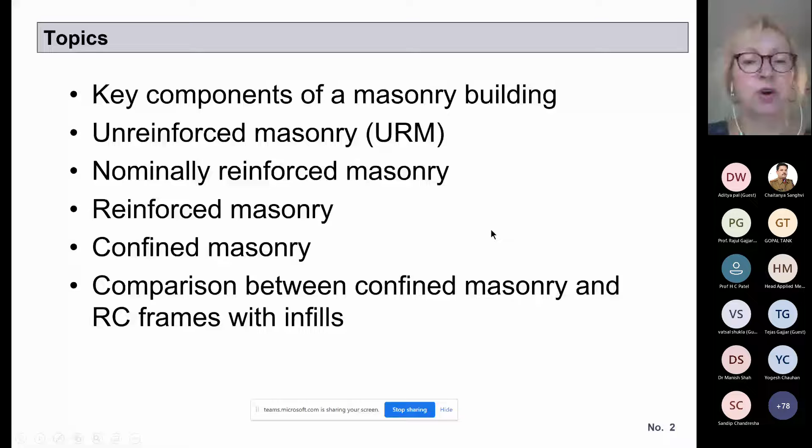So key components of masonry buildings are masonry walls, and this is a load-bearing system. There are load-bearing and non-load-bearing walls. Non-load-bearing walls carry only self-weight and practically no additional loading, whereas load-bearing masonry is what we are designing as structural masonry, which carries both gravity loading and lateral loading. It is a structural system in the same way as the frame is a system.

Horizontal structural components are very important in masonry buildings and influence their behavior, and these are floors and roof structures. In this course, we'll be mentioning them as diaphragms when resisting lateral loads. So even though it is floor, we will call it diaphragm for this.

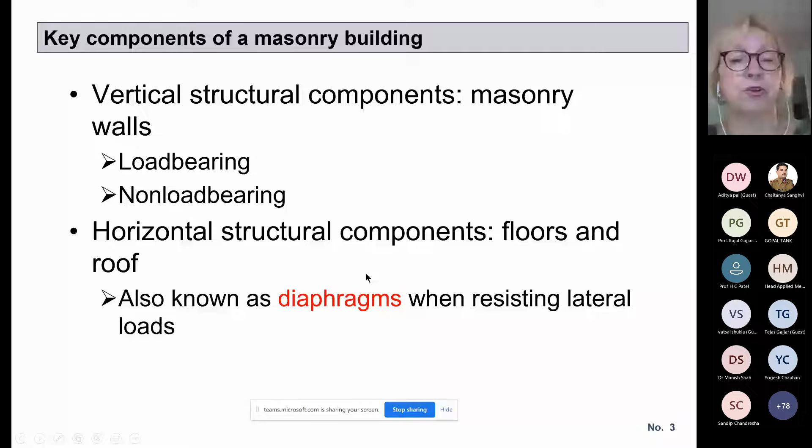So this is a typical masonry building with lots of walls in both directions, as you can see, and then floors. And in the building, it is very important to have very good integrity, as we were discussing, that is good connections between the walls, good connections between walls and floors and roof. And in any case, it is a completely different system than reinforced concrete frame.

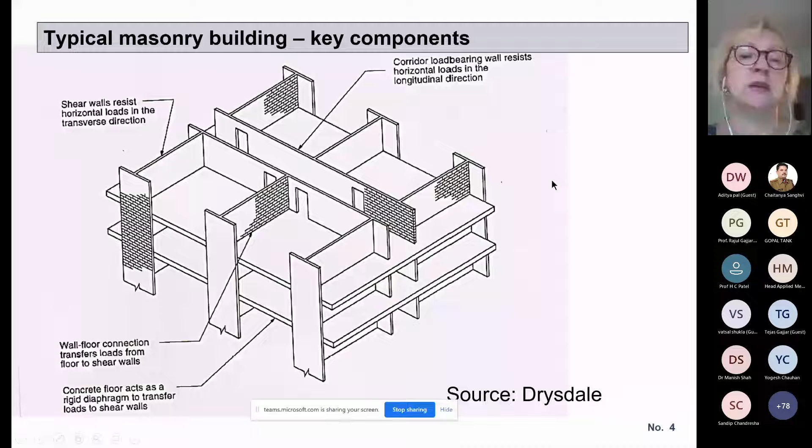And for those who are familiar and used to designing frames, in the first stage it may be a bit more unusual. I wouldn't like to say complicated - everything is maybe complicated, but we would like to try to make it simple and understandable in this course.

The first masonry technology that we're going to discuss is unreinforced masonry, or URM. In the technical literature, very often instead of saying unreinforced masonry, it's used URM, and I like to use it just for a shortcut. So these are masonry wall structures without any reinforcement in the walls, without horizontal or vertical reinforcement.

There are millions of existing unreinforced masonry buildings around the world. Many of them are in India, and since India accounts for 20% of world's population, many of these buildings are in India, but in any other country in the world we do have unreinforced masonry, since this was the technology that has been practiced from ancient times.

Until practically this century. In masonry, and we'll talk tomorrow about masonry materials, we have various masonry units. Unit is not an SI unit like meter versus imperial unit - in masonry, unit is the building element, and that could be stone or adobe block or clay brick or block or concrete bricks or block. So with unreinforced masonry, we can use all kinds of masonry units.

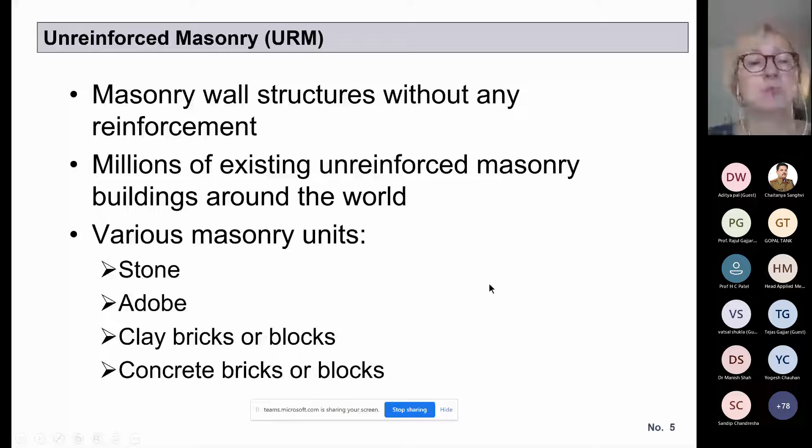Historically, there are many stone buildings, there are many adobe or unburned clay or mud buildings and so on, and they are all used in unreinforced masonry. And in general, unreinforced masonry - these are some examples from India.

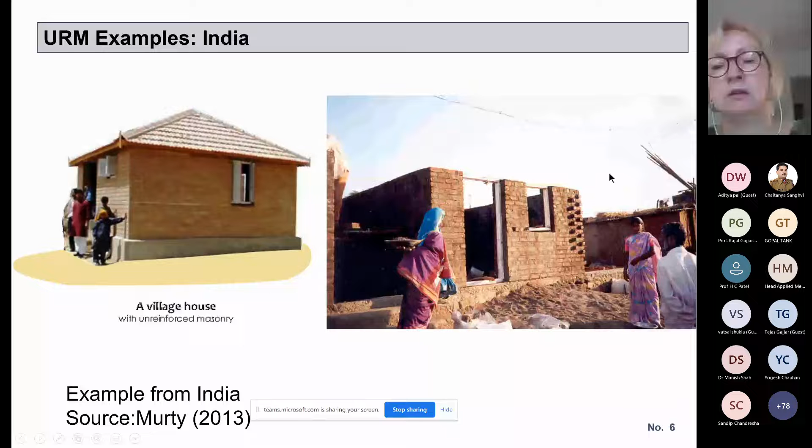Except the right photo. The left photo is from a publication by Professor Murty, published in Gujarat, on confined masonry. The right photo I took in Maharashtra after the 1993 Kilari earthquake. I worked in rehabilitation of the affected area, and people were building new brick masonry buildings with seismic provisions according to IS 4326.

These are typical brick masonry buildings in India. In other countries like the USA, there are some outstanding examples of unreinforced masonry in relatively modern times, from the 19th century, more than 100 years old now. This is one of the tallest unreinforced masonry buildings, a so-called skyscraper, 16 stories high, built in Chicago, USA. It's called the Monadnock Building. It's still standing there today.

It had unreinforced masonry walls which are 6 feet or 1.8 meters thick at the base, and the thickness decreases toward the top. When the building was constructed, there was very negative publicity, and media and newspapers claimed it would collapse within 2 or 3 years, but the building is still standing today. Unreinforced masonry is a very good technology, and as I said, it has been used for centuries or millennia.

But it is good for gravity loading when there are no earthquakes, when there could be winds but not earthquakes. And Chicago is one of those areas. It does not have seismicity there, so that's why it is no problem.

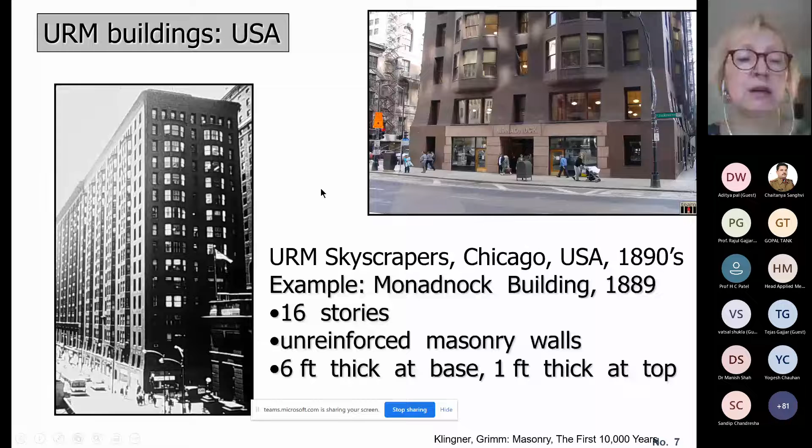However, on the west coast of the US, in places like Washington State or California, there are frequent earthquakes, and unreinforced masonry has been very badly damaged in those earthquakes. These are some photographs from the 2001 Nisqually earthquake which affected central Seattle. There were many older unreinforced masonry buildings, many of which had not been retrofitted for improved seismic resistance. This is an example where you can see the top portion collapsed - these are parapets - so the load-bearing building remains standing, but it was very badly affected.

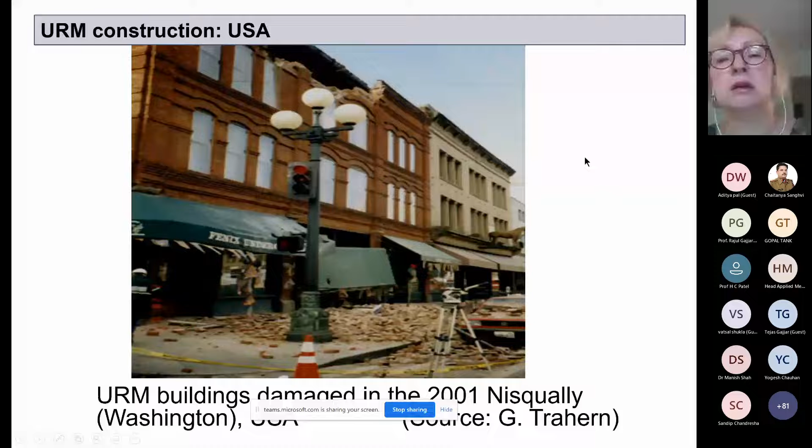Similar photographs were available after earthquakes in California. So reinforced masonry construction came about because of the poor performance of unreinforced masonry in the US, particularly in the 20th century. It was the 1933 Long Beach, California earthquake, where many school buildings were unreinforced masonry, and they were badly damaged or collapsed.

There was a decision at the government level to introduce reinforced masonry, and that practice started after that earthquake in the US, specifically in California. To this date, in the US, most masonry buildings constructed are reinforced masonry, but in some places it is still permitted to use unreinforced masonry if there is very low or no seismicity.

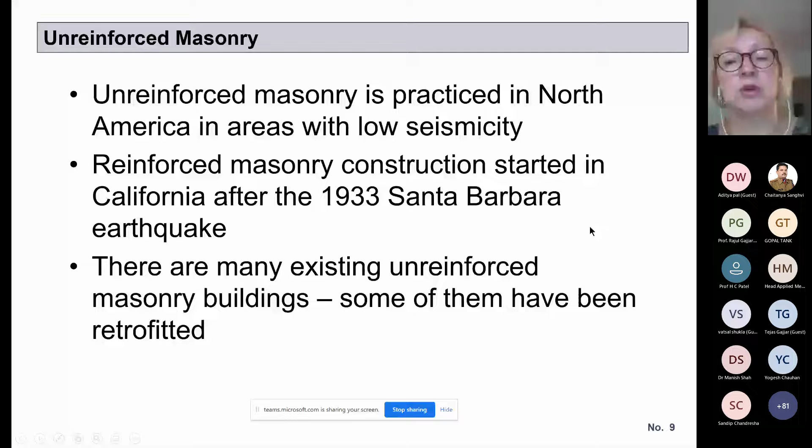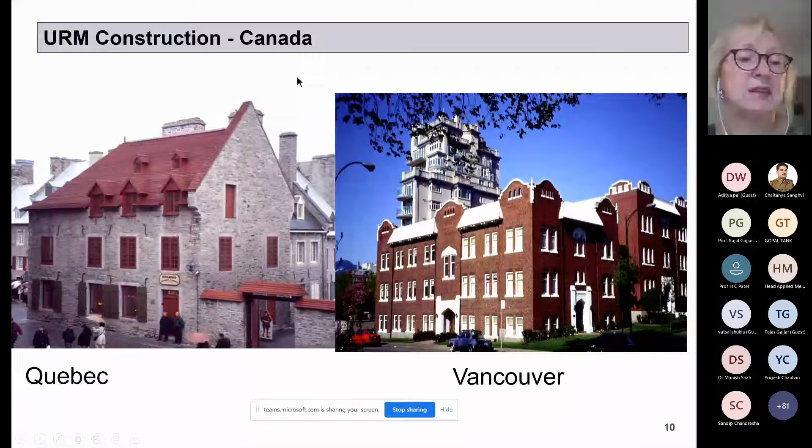There are some examples of masonry buildings from North America - these are from Canada, old unreinforced stone masonry buildings in Quebec and in Vancouver. Many of these buildings have not been retrofitted, and even though they're in high seismic hazard areas, there are no frequent earthquakes, even though the hazard is high.

In this course, we are not going to talk about unreinforced masonry anymore. The next technology is called nominally reinforced masonry. It's not generally known in the literature under that name - for example, in the Canadian code it is mentioned as nominally reinforced, but in Indian codes the term doesn't exist. So what do we mean by nominally reinforced?

We would say it is mostly unreinforced, but some reinforcement is provided at critical locations in the vertical and/or horizontal direction, such as vertical reinforcement at door and window openings and at wall intersections, and reinforced concrete bands at plinth, lintel, and/or floor level. This is the type of masonry that has been practiced in India according to the codes until now.

The idea of this technology, and any technology for reinforcing masonry, is to achieve so-called box action of masonry, which is critical for good seismic performance. Box action is when we have a simple structure of 4 walls subjected to seismic forces, as shown in the left drawing. If the walls are not connected, there is significant out-of-plane movement of the walls, and possible collapse and separation at the intersections. If there is nothing on top to hold them together, there is definitely a possibility of collapse at higher earthquake levels.

However, if the walls are somehow connected at the intersections, at the corners, and if there is a rigid floor or roof at the top, there is a good chance for box action and integrity. So the purpose of this nominally reinforced masonry is to achieve this integrity, which is a critical characteristic of good masonry performance.

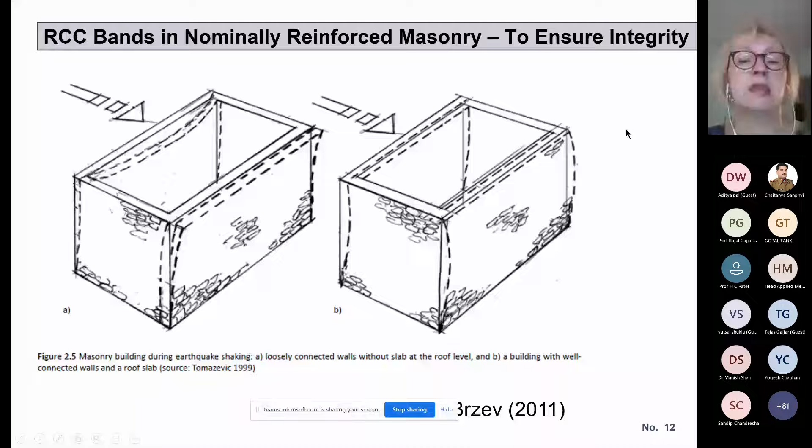These horizontal bands were introduced in India and were first seen in application after the Assam earthquake at the end of the 19th century. Good performance was observed after the earthquake, but it took a number of years to get into the codes. It is now part of India code IS 4326 and IS 1893.

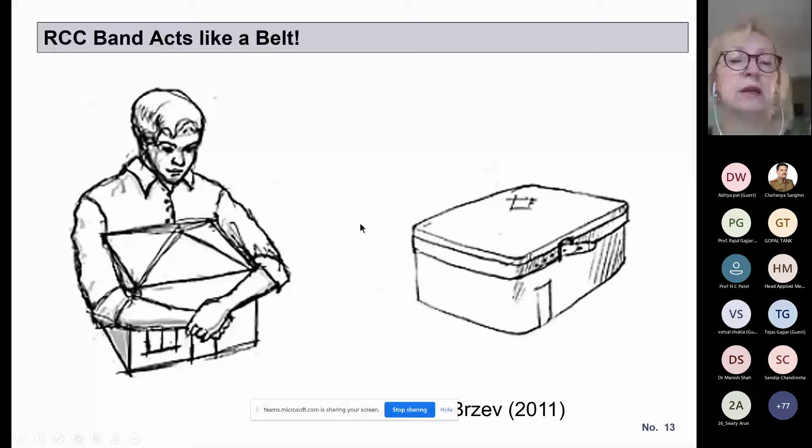In any case, the function of this belt or horizontal band is to act like a belt. These are the provisions now present in India with nominally reinforced masonry: horizontal bands at lintel level, at floor level, roof level, sill level, and plinth level. They are mandatory for masonry construction in seismic zones of India.

Unfortunately, this has not always been applied, and for that reason, in many earthquakes, including the 2001 Bhuj earthquake, masonry buildings that did not have bands performed poorly, but buildings that had bands performed much better, even though the earthquake was very strong.

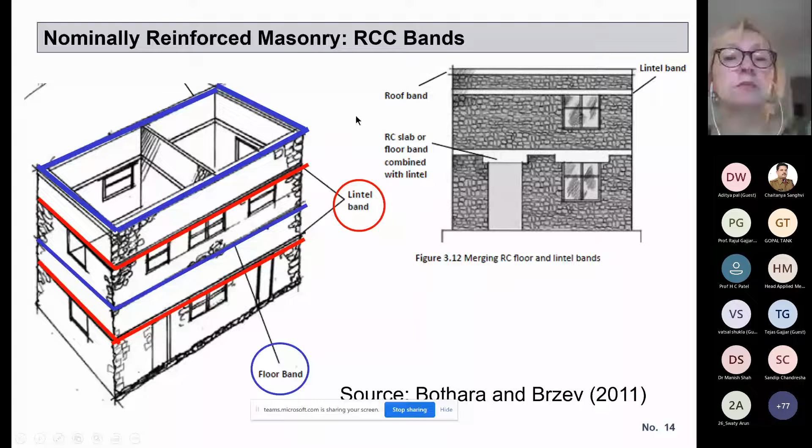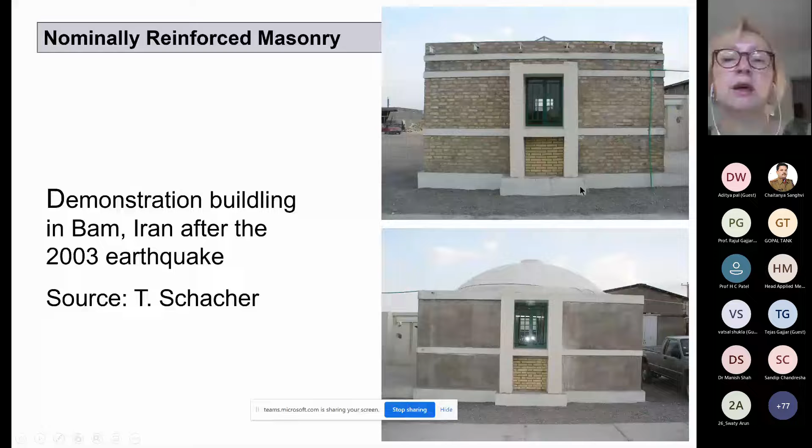In many cases, the walls were of adobe construction. So after the earthquake, they introduced bands in post-earthquake rehabilitation.

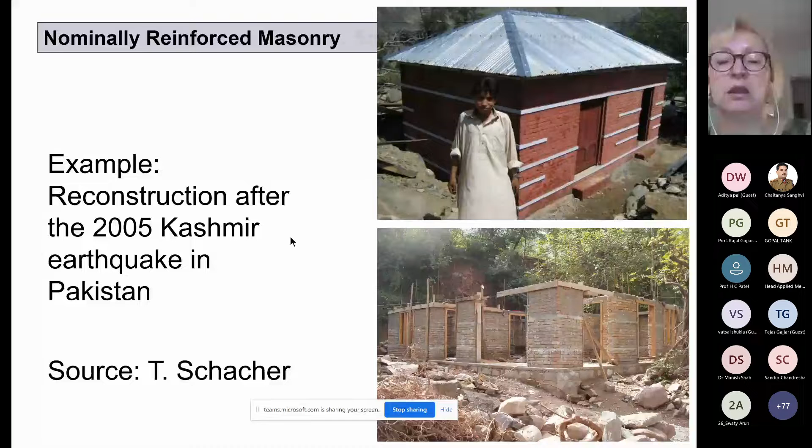Good testing has been done at different scales in different parts of that region. One important testing program of buildings with bands was in Pakistan after the 2005 Kashmir earthquake, where researchers at NED University in Peshawar tested models of stone masonry buildings. On the left is an unreinforced building with a concrete roof, and on the right is a building with bands and a wooden roof, which is common for that region.

This building has horizontal bands, plus it had vertical elements. At the corners, it had something like confined masonry. At the end of this presentation, I have videos of testing of this that was done on a shake table at the University of Peshawar under very strong earthquake loading.

As you can see, in the final results, the building that had bands experienced some damage—you can see part of the wall is missing on the right-hand side—but it did not collapse. Whereas the building with a concrete floor roof but without any reinforcement collapsed at the same level of earthquake shaking. I included a reference to the paper published related to that testing, by Professor Qaisar Ali, who is the primary author.

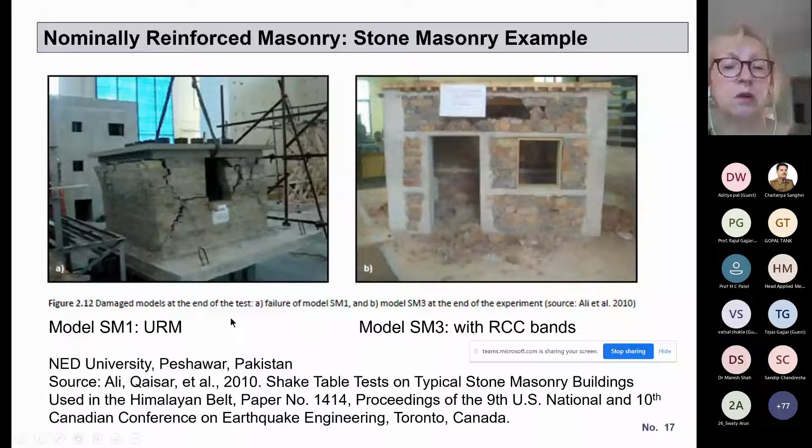In India, there were efforts to also reinforce brick masonry vertically, but this is a bit problematic and challenging for practical implementation. This is the so-called Quetta bond, which is well known in India and was developed there. It enables construction of vertical reinforcement in so-called pockets between the bricks, which are filled with mortar.

I witnessed construction of these pockets for my PhD thesis, which involved reinforced masonry with vertical reinforcement at the corners. It was very time-consuming for masons and a bit complicated because of the numerous cutting of bricks required. But it is possible to provide vertical reinforcement in brick masonry; in any case, this is one of the rare examples. It is considered difficult to provide vertical reinforcement in brick masonry.

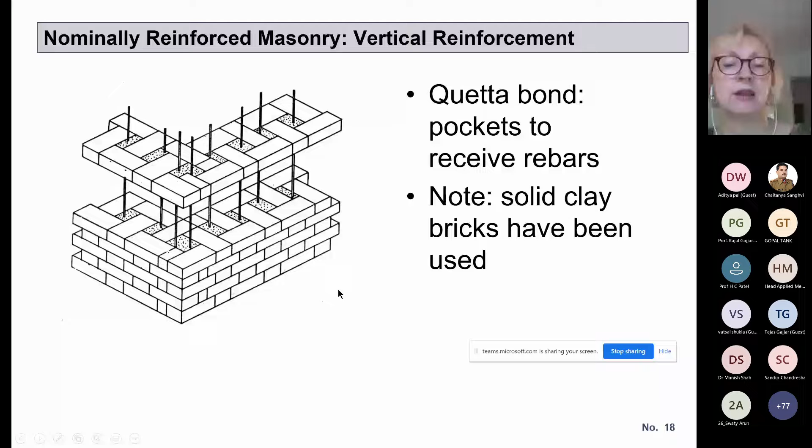Horizontal reinforcement in the form of bands is not a problem, since these are reinforced concrete elements. These are examples, also part of Indian codes, of how to provide these pockets with vertical bars. It is usually a single vertical bar which has no confinement, just embedded in mortar, not concrete. These are relatively small pockets, about 10 by 10 centimeters, so only one bar could fit there.

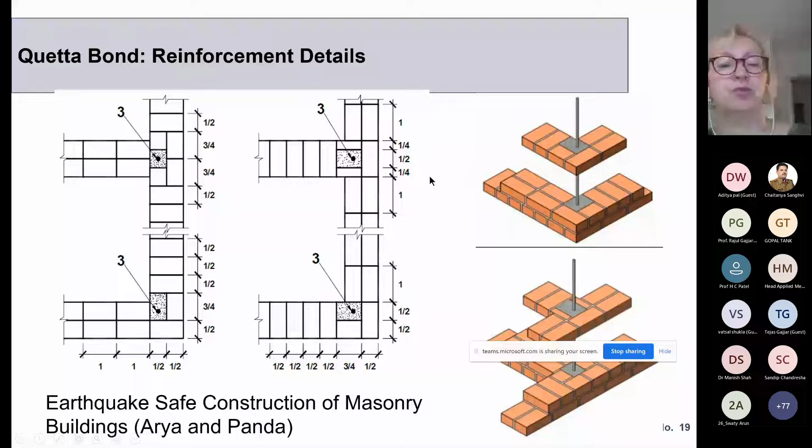So, to conclude on nominally reinforced masonry, we are not going to discuss that further since it is not the topic of this course. It's definitely much better than unreinforced masonry, and it has its own benefits.

It does improve performance in earthquakes. This was shown in Indian earthquakes. I've seen buildings in the Kilari area in Maharashtra, affected by the 1993 earthquake, which had bands. It was undamaged in that 6.2 earthquake or so, where all surrounding stone masonry or unreinforced masonry buildings collapsed. It was in the epicentral area of the earthquake. It is a very well-known building, at that time at least.

For that reason, due to limitations of nominally reinforced masonry, there is a technology called reinforced masonry. We should be careful what we call reinforced masonry, because it has been established globally that reinforced masonry means masonry with internal horizontal and vertical reinforcement. That type of masonry has been practiced in North America, US, Canada, and then Australia, New Zealand, UK to a certain extent. It is not much practiced in Europe, but North America for sure is the area where it has been practiced significantly.

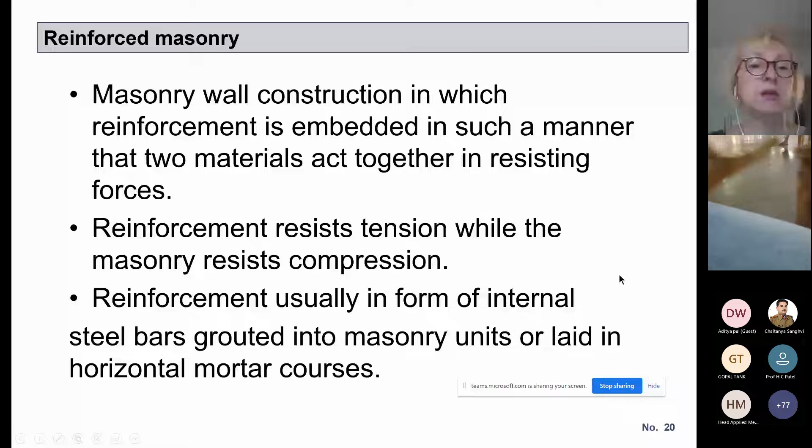Here are some examples of that masonry construction. You can see hollow concrete blocks. On the left photograph, you can see horizontal reinforcement in the form of a ladder - that is not the main horizontal reinforcement, just one form of it. The middle photograph shows a mason applying mortar on the vertical masonry joints, and then a mason laying a block. These hollow concrete blocks are pretty heavy - weight of one block is about 15 kilograms, much heavier than bricks, which are about 3.5 kilograms or so.

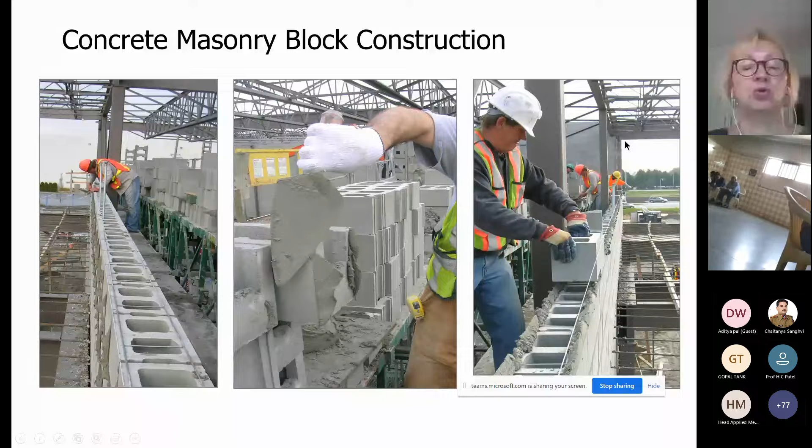This is a drawing that shows schematically how reinforced masonry is used, how it can be constructed. You can see vertical bars in the hollow cores or cells of these blocks, and around it, this shaded area is concrete. It is actually grout, but it's not mortar - it is like a micro concrete, so small size aggregate is used.

And horizontal reinforcement comes in two forms. One is this ladder type reinforcement with small size wire, like 3 mm, called joint reinforcement because it is embedded in masonry joints. Then there is another type called bond beam reinforcement, which is the same type of bars as vertical reinforcement - the same bars used for reinforced concrete construction, like 16 mm, 20 mm, or 12 mm bars.

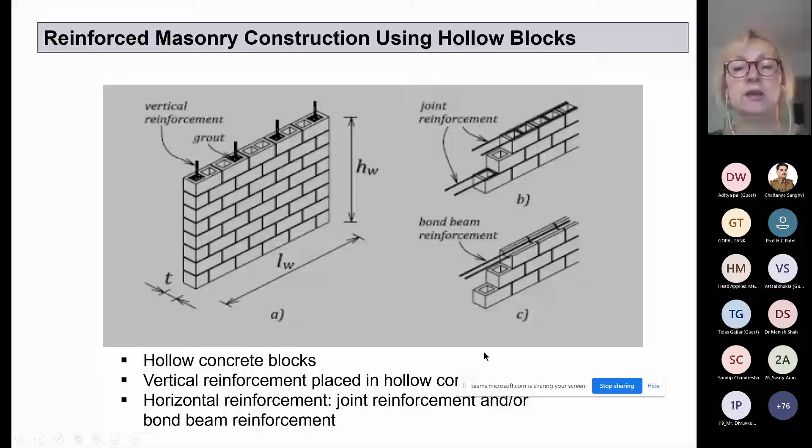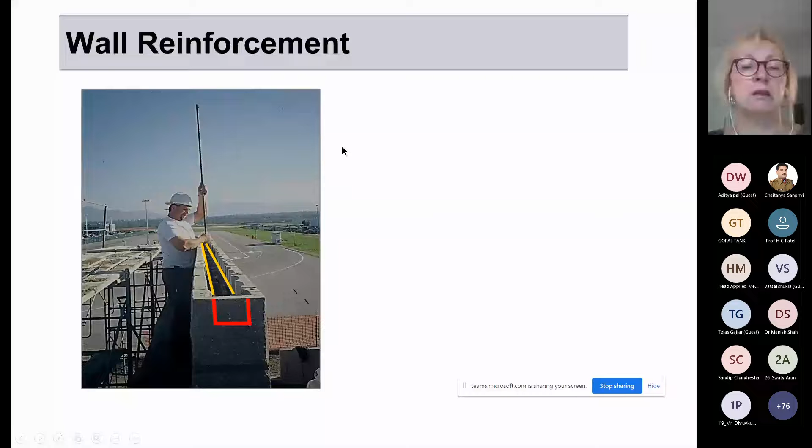So these are some examples, and this type of masonry is practiced extensively in North America - no other form of reinforced masonry is used. You can see a mason placing a vertical bar, which has to go through the entire wall height, and on the left drawing the yellow color shows these horizontal bars. The red area shows where blocks have been cut to enable continuity of horizontal reinforcement. On the right, you can see the wall after grouting, with vertical bars frequently spaced.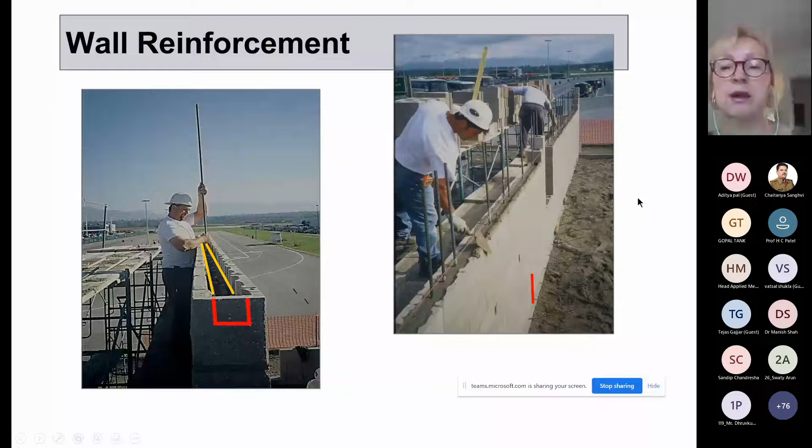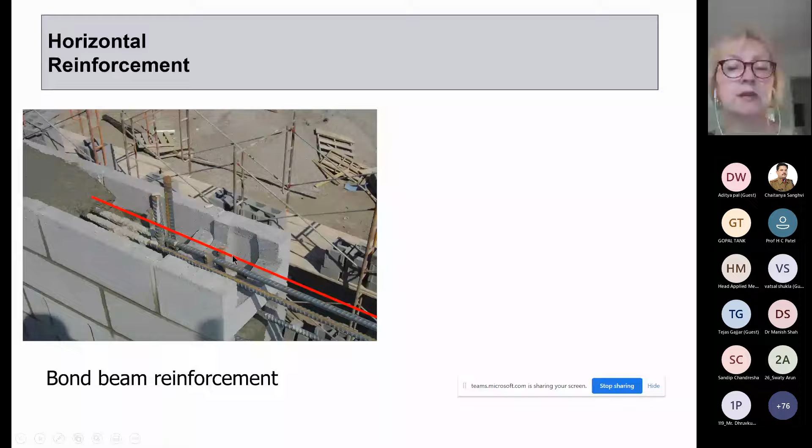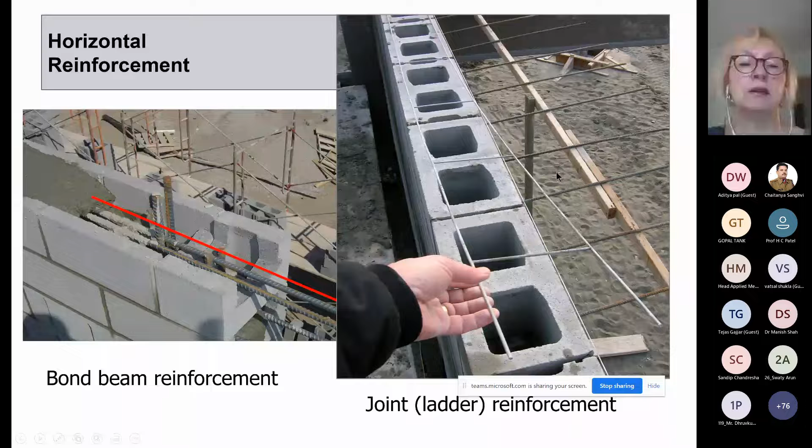So here you can see bond beam reinforcement. You can see how the blocks have been cut to receive this reinforcement, and you can see ladder reinforcement, which can now be clearly seen - there's a very small size bars. This bond beam reinforcement is Tor steel, same as vertical reinforcement in reinforced masonry. So it's practically the similar system like reinforced concrete, except there is no need for formwork, since the blocks already create a formwork for this construction. So it's very practical and cost effective, since formwork costs have been saved.

This is a final photograph of this. And this is how a vertical section or elevation of a wall looks like. You can see the shaded areas which show locations where the bars are provided, and you can see that there are quite a few bars in vertical as well as horizontal direction.

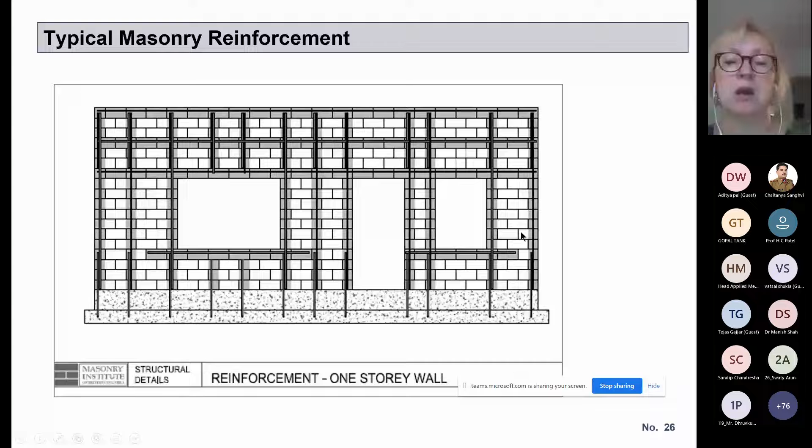Grouting in this reinforced masonry is, as I said, micro concrete. This photograph shows an early application of grouting with a bucket, from the end of the 19th century - from 1868 in the USA. It's a cementitious mix. Grout is a cementitious mixture used to fill cores or cavities in masonry construction.

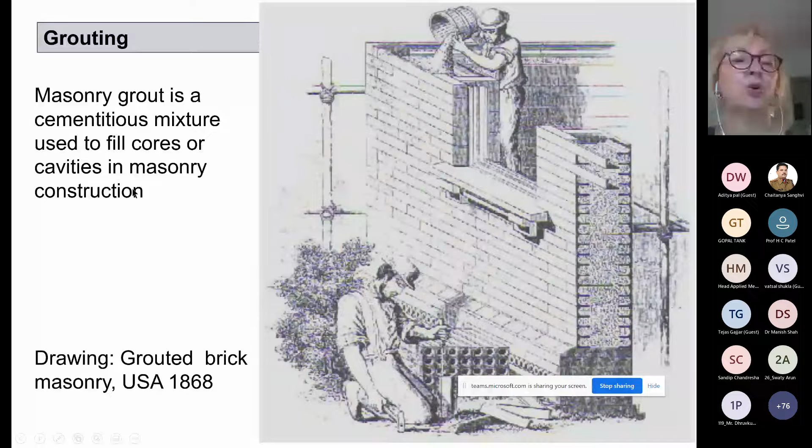So you can see how it looks like in modern masonry construction in Canada, USA, and other countries. Grout is usually placed when a truck comes - the grout is manufactured in the truck and then placed by a hose into the masonry, pumped into the wall in the same way as concrete would be poured. You can see here the process of grouting.

This explains this technology, which is very efficient and used widely in some countries, but is not used in most of the world. I would say most places would not use this reinforced masonry in this form like it is used in Canada, USA. Now I think there is a growing use of it in Mexico as well. I think that is the end of this.

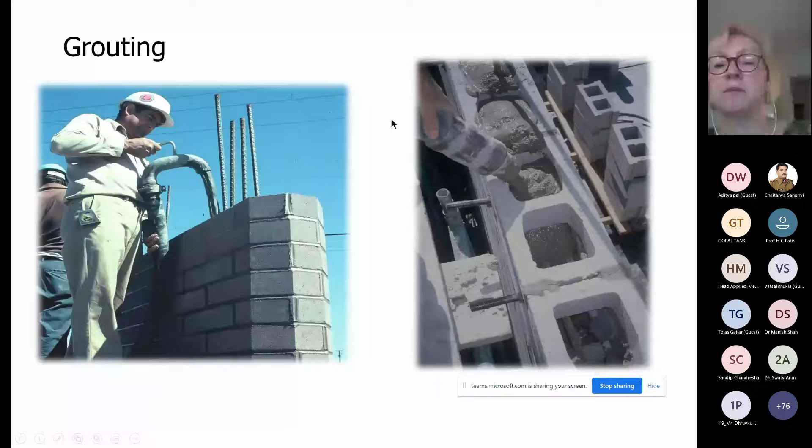This is an example of reinforced masonry construction in Canada - a school building. You can see an interesting example of a curved wall which can be constructed using this technology. So very often the exterior facade of this building is not plastered - it's just left exposed, and this is possible even though weather conditions may be harsh, but there are no problems because reinforcement is fully embedded and there is no possibility for corrosion in this type of construction.

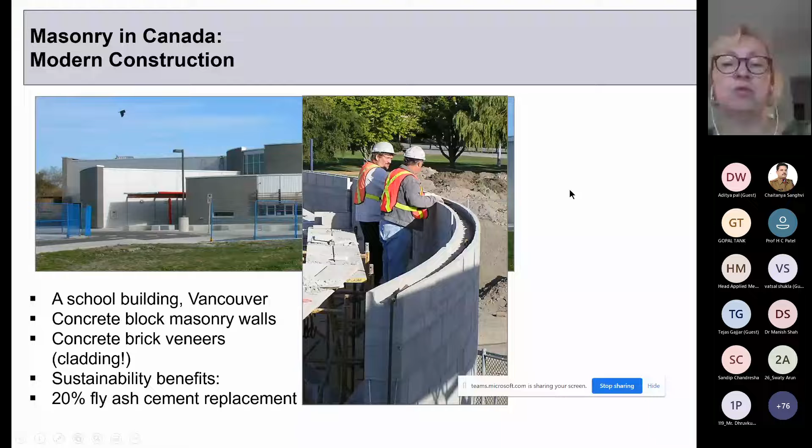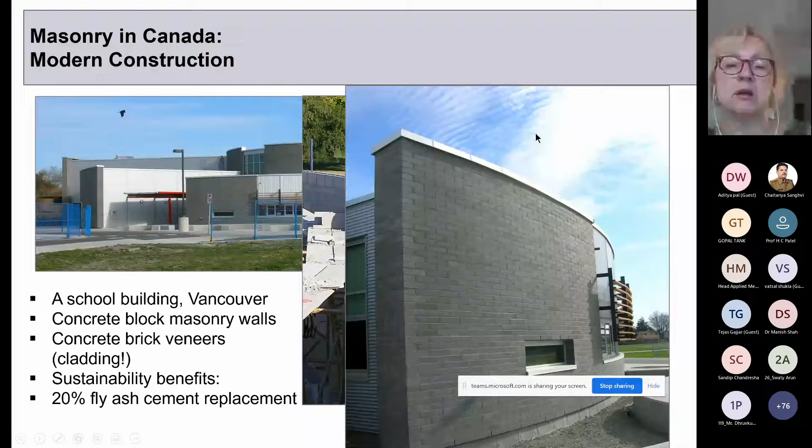So this is exterior - this is also an additional layer of masonry exterior, which is so-called veneer. It's like a facade element on top, an additional layer, which is non-structural in masonry buildings.

In Chile, for example, I've seen examples of reinforced masonry with hollow clay blocks. They would look the same as concrete blocks, but they're made of clay. In Chile, they mostly use confined masonry, but I've seen examples too. So in some Latin American countries, even though confined masonry is the prevalent type of construction, they also use reinforced masonry, in some cases with clay blocks. But such blocks, I believe, are not currently available in India.

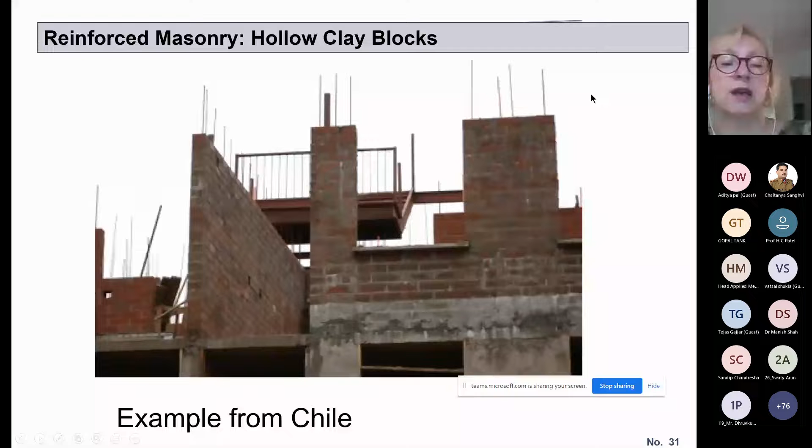On the large scale, masonry units or elements may be expensive. To conclude about reinforced masonry, it's a very good form of construction if the type of masonry units or elements are available and of good quality. Right now in many countries there is a tendency to use concrete blocks made at small scale facilities without proper conditions for manufacturing, which leads to poor strength of masonry construction.

So for that reason, unless there are good large-scale plants for manufacturing, it is better not to use reinforced masonry in high seismic zones. That brings us to confined masonry, the last part of this lecture. This is an introduction to confined masonry, to define confined masonry. If we were in a classroom, I would ask how many of you know about confined masonry or have seen a confined masonry building, since the code has just been issued in India and there were not many prior examples.

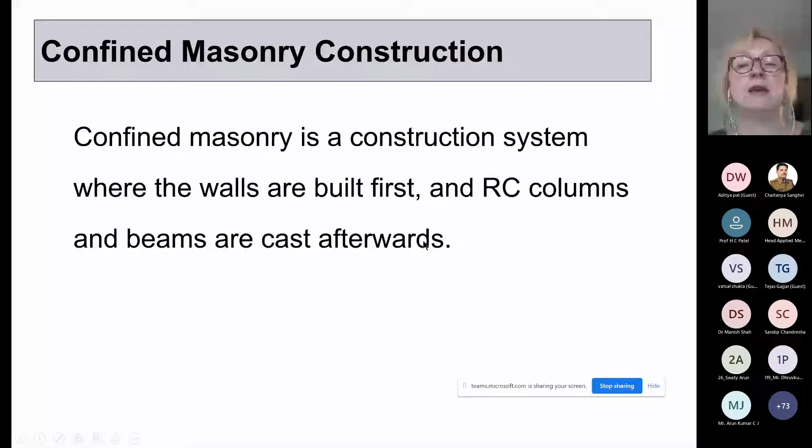So confined masonry is a load-bearing masonry construction system, same as unreinforced masonry and reinforced masonry. In that system, walls are constructed first, but there are reinforced concrete column-like and beam-like elements which are cast afterwards. And these are some examples.

These are graphic examples from a publication by Tom Schacher, also available through NICEE. On the left side we can see a confined masonry structure with masonry walls, and in the corners and specific locations, confining reinforced concrete vertical elements with reinforcement and concrete. Whereas in reinforced concrete frame construction—and we'll discuss this difference between the two systems at the end of this lecture—

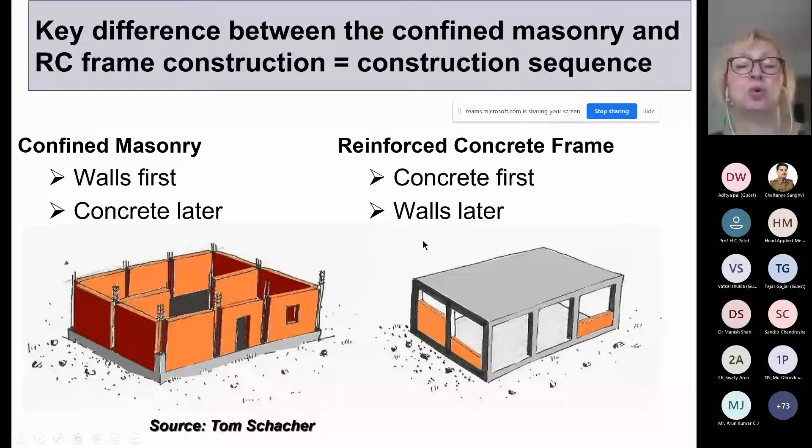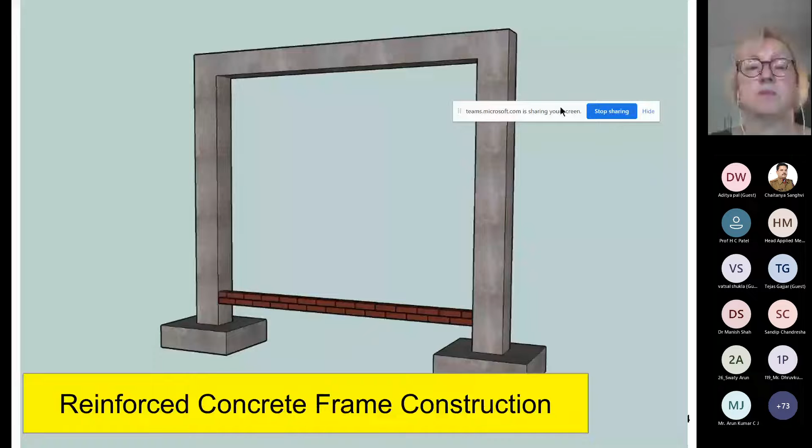first we construct the reinforced concrete frame, and then masonry walls are infills, merely infills to the frame. So that is a different sequence, an entirely different system, even though they may look alike once construction is finished. This is an animation of reinforced concrete frame construction—this is how it looks like.

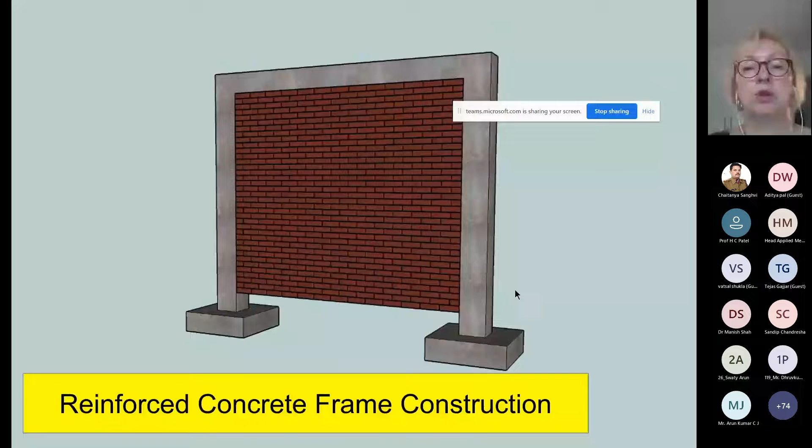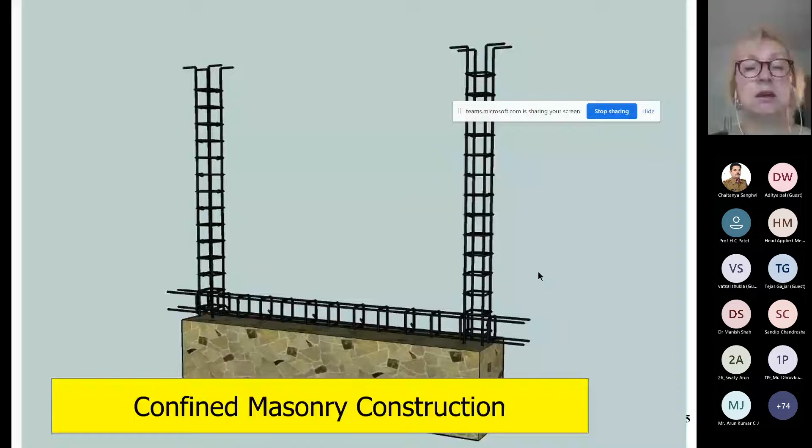For confined masonry, reinforcement has to be constructed at the beginning. This is the foundation level, plinth band, then masonry walls, followed by reinforced concrete tie columns, then the tie beam horizontal element, and then the slab. So floor by floor, the construction progresses in this manner.

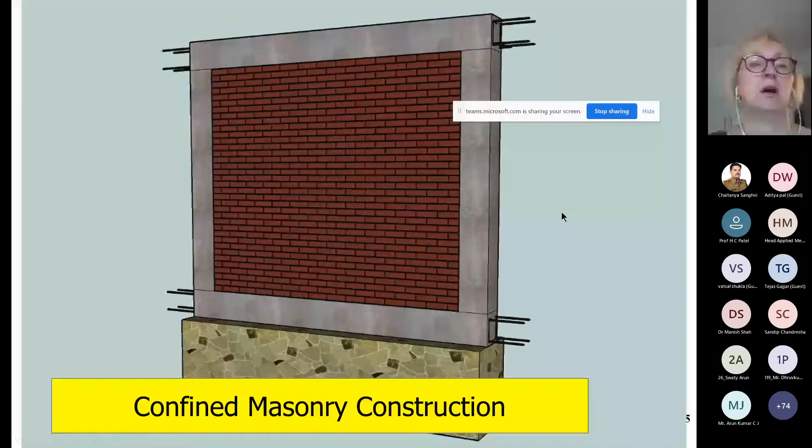Key components of confined masonry buildings are: masonry walls, made either of clay brick or block units, whether clay or fly ash, whatever is available; tie columns, which are vertical reinforced concrete confining elements resembling columns in reinforced concrete frame construction; and tie beams, horizontal RC confining elements resembling beams in reinforced concrete frame construction.

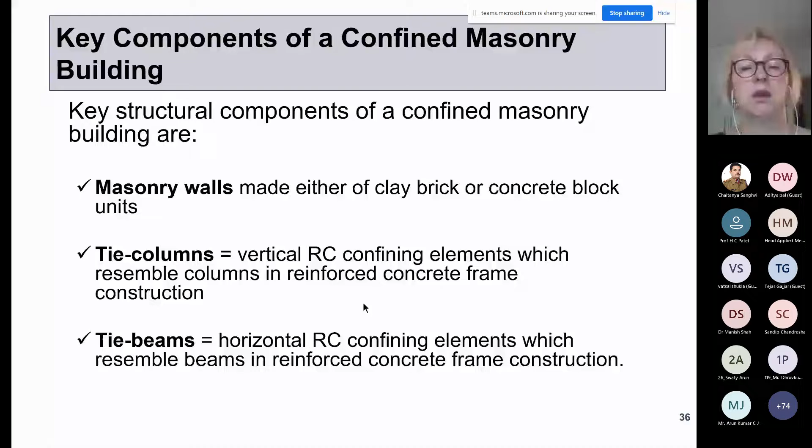Here is an example of how a confined masonry building in India will look. There are certain rules for where vertical confining elements are placed, as we will discuss. You can see this differs from reinforced concrete frame construction—there are vertical elements in the wall between window openings, and of course at corners and wall intersections. Horizontal elements are provided at floor and roof levels, but also at the lintel level.

This is not common in other countries, but in India, because of the long history of lintel bands in the code, a lintel band—and in some cases a sill band—is always present and prescribed by the confined masonry code, as you will see.

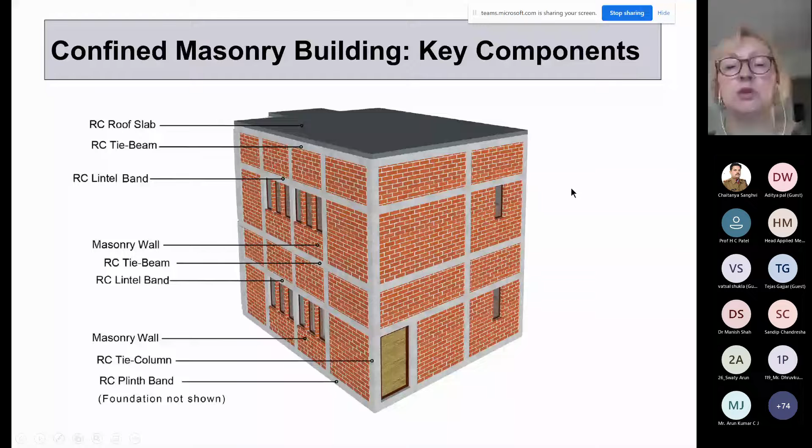So how did confined masonry construction start? What were its beginnings? It evolved through an informal process based on satisfactory performance in past earthquakes—good earthquake performance. It was not designed or developed by engineers. The first use of confined masonry was after the 1908 Messina, Italy earthquake, which had a magnitude of 7.2 and killed about 70,000 people. At that time it was used in reconstruction, but what happened is that in the area of Messina there were already some confined masonry buildings before the earthquake, and they did not collapse.

So that is how it was first observed, and when it was first observed. Afterwards, the technology was transferred to Latin America, and it started being practiced in Chile and Colombia since the 1930s, and Mexico since the 1940s, and then in other countries. So it is very widely used in Latin American countries, which are also very prone to earthquakes.

Currently it is practiced in countries and regions with high seismic hazard and risk, including Latin America, Mediterranean Europe, Middle East, for example Iran, Indonesia, South Asia, and the Far East, which is China. China, for example, has had a code for confined masonry for many years. Many of these countries have codes which have been in place for many years for confined masonry.

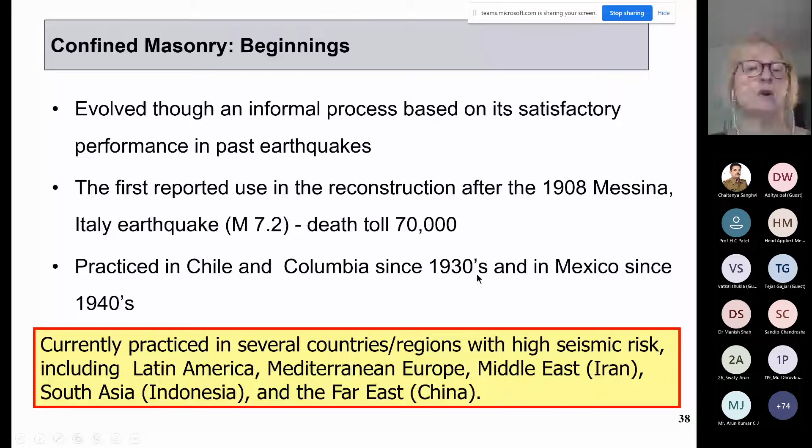Some examples: this is an example of a confined masonry building from Mexico. You may not be able to see the vertical reinforcement well on the slides right now. This is an example with hollow concrete blocks, but it is confined masonry.

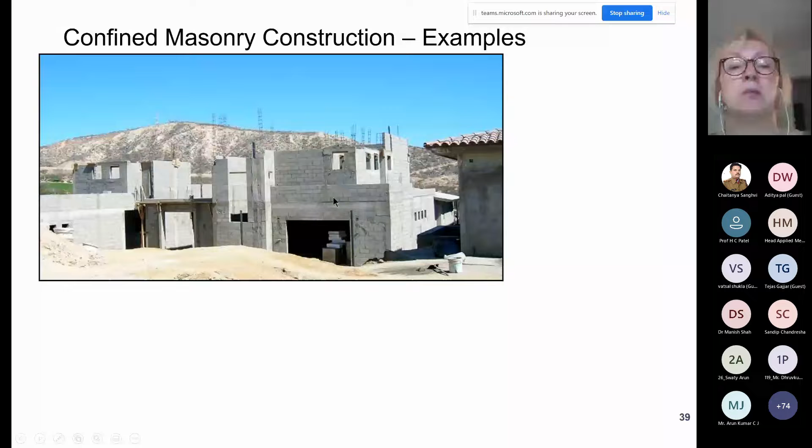This is an example from El Salvador, which is one of the rare countries where they have a band, like a tie beam, at the sill level. This is usually not common, at least in Latin American countries, and it's not prescribed by the codes.

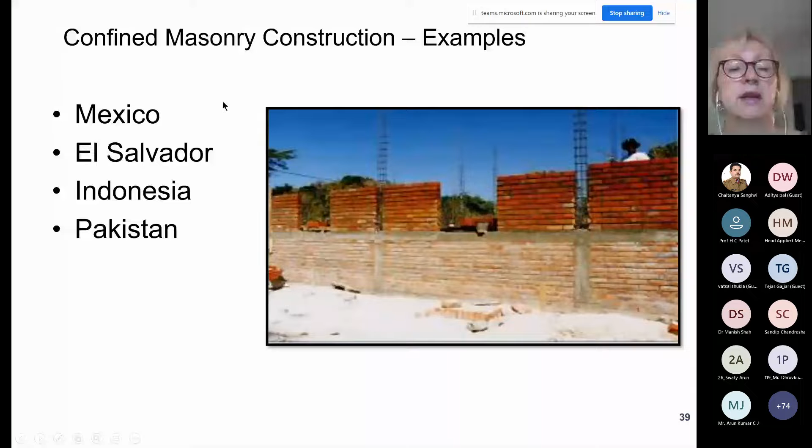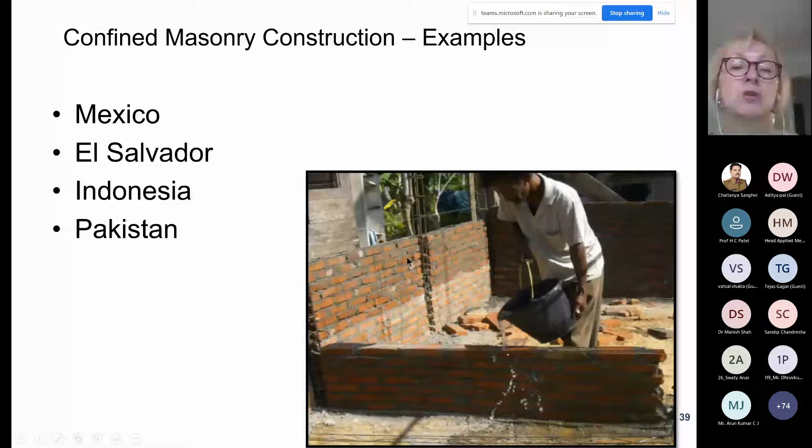The result of this earthquake was a very small death toll of only 500 people, out of which 100 died in the tsunami. So very few people died due to confined masonry building collapse. It performed really well in that earthquake.

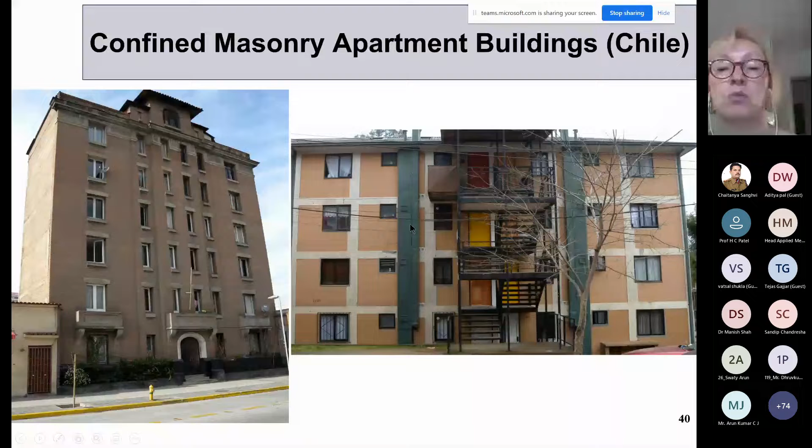As I said, it performed really well in this February 2010 Chile earthquake. And I believe you also remember that same year, 2010, but in January, a magnitude 7 earthquake struck Haiti. The death toll is not confirmed to date, but more than 2 to 3 lakhs of people died in that earthquake.

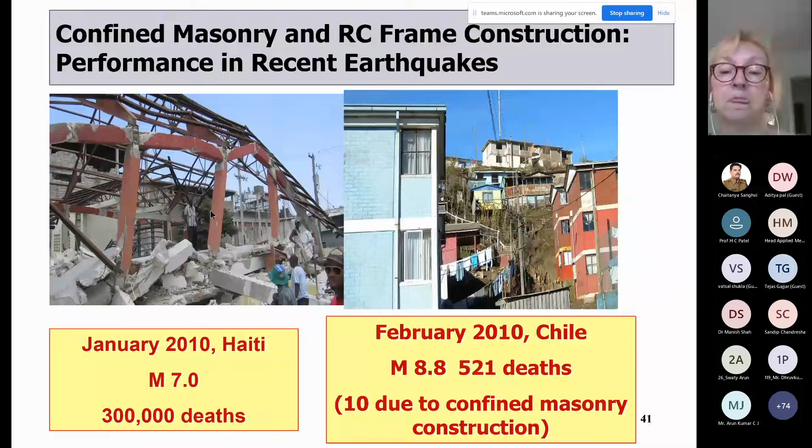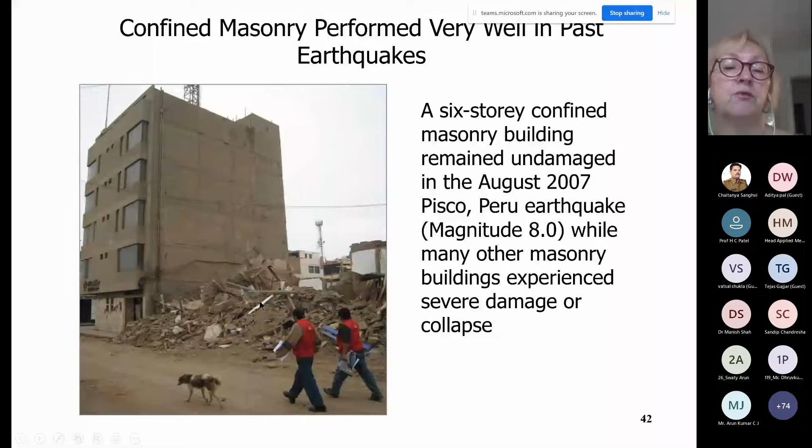In other Latin American countries like Peru, a similar performance of confined masonry has been observed. This is an example of a confined masonry building that survived the 2007 Pisco earthquake, magnitude 8, where the surrounding unreinforced masonry buildings collapsed.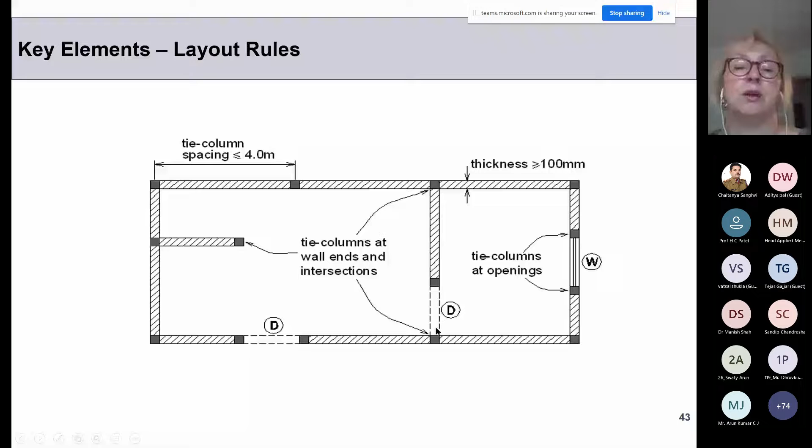Tie columns need to be placed at wall intersections, at wall ends, and at openings as well. These are some rules which have to be followed in order for a structure to be considered confined masonry. Otherwise, we cannot call it confined masonry, or treat it as a confined masonry structure. So confinement at the openings, at the ends of the openings, is critical, as well as the other locations.

There are rules, and we'll talk about that when we talk about the section on construction or detailing of confined masonry buildings later this week. What are the rules prescribed in the IS code related to the thickness of the walls, minimum height to thickness ratio of the walls, and so on? It has all been prescribed in a similar way.

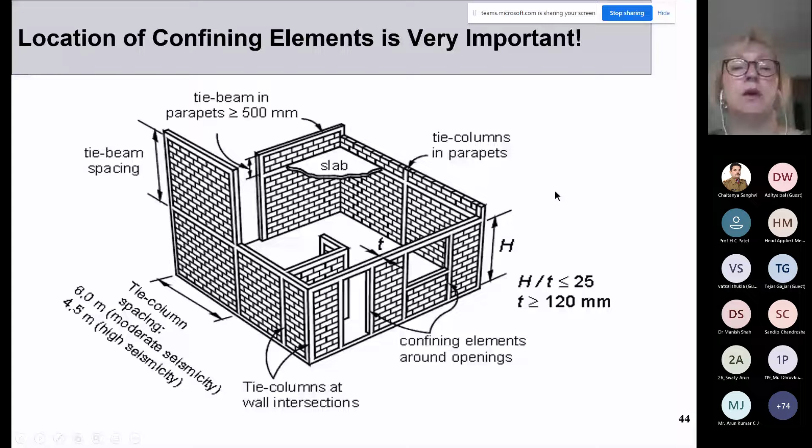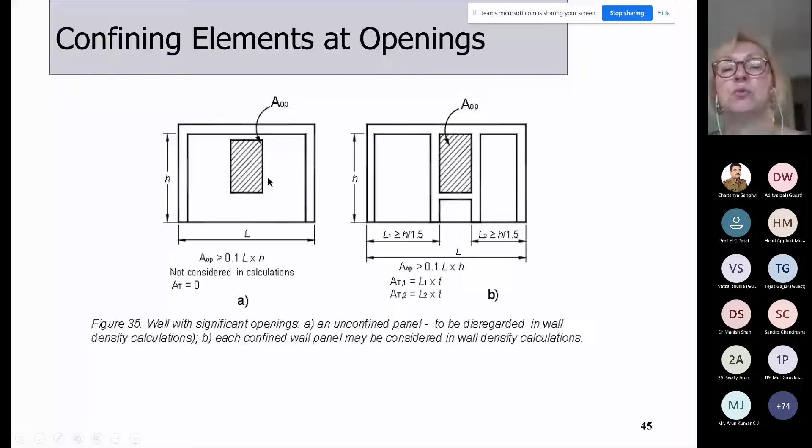If we have a confined masonry wall which has only confinement at the ends, but we have a very large opening, more than 10% of the area of this wall, we call a wall or wall panel the one that is enclosed and confined on all sides by these confining elements. If there is no confinement around large openings, then we don't consider this wall as confined. If we want to consider it as confined, we need to provide the same vertical confining elements as at the ends.

This effect of confinement at openings was revealed or confirmed in past earthquakes. Buildings that had no confinement at the openings, but had confining elements in the middle because there was another wall in the other direction, showed more extensive cracking and damage. Not necessarily collapse, but more extensive damage than in buildings that had confinement. On the right-hand side, this was a building that was exposed significantly to the 2010 Chile earthquake, and it had confining elements at the openings and performed well with some cracking, which is understandable given the size of the earthquake.

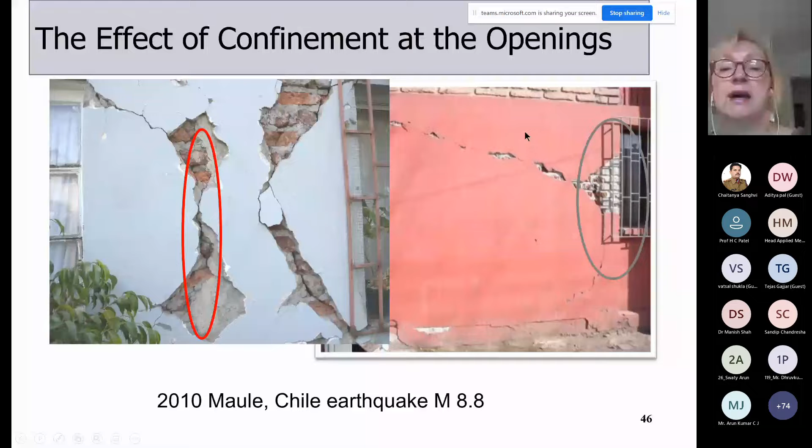Another feature of confined masonry is toothing. Toothing is an interaction, an enhanced joint action between the concrete and masonry in confined masonry walls. There are horizontal toothing elements, like zigzag, and in brick masonry it is possible to extend some of the bricks in a zigzag manner, like teeth. That's why it's called toothing. It is small in dimension, something like 2.5 centimeters. It requires a bit of complexity in construction in the beginning, but once there is practice, it becomes easier over time.

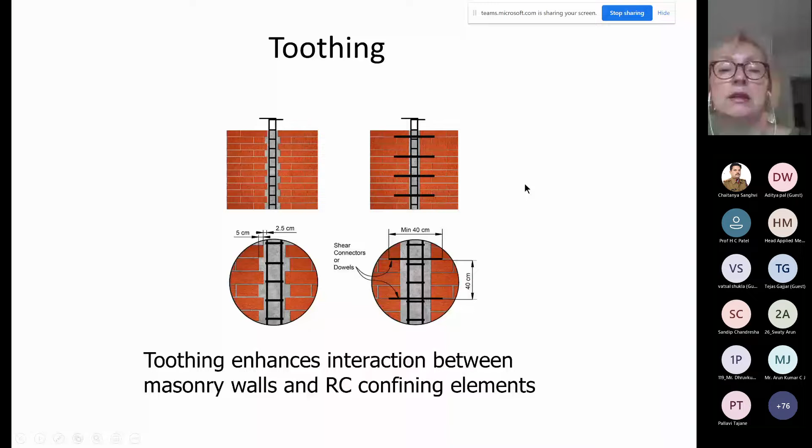When concrete is cast, it forms some form of shear key between the masonry and concrete. This, of course, is not in place in reinforced concrete frame buildings, where concrete columns are constructed first, so you don't have this toothing. If blocks are used instead of bricks as the masonry unit, it is often not possible to create toothing in the same way as in bricks. But in that case, it's possible to place horizontal reinforcement to cross this interface between the concrete and masonry, and that is an alternative to toothing, called shear connectors or dowels. So in both cases, this is some form of shear key which enables better joint action of masonry and concrete in confined masonry construction.

This is an example from Mexico. You can see this is a concrete block, there is no toothing, but there would be reinforcement going from the joints and extending into these tie columns. And this is in Chile - on the right-hand side you can see horizontal reinforcement and toothing. In some cases, they use both.

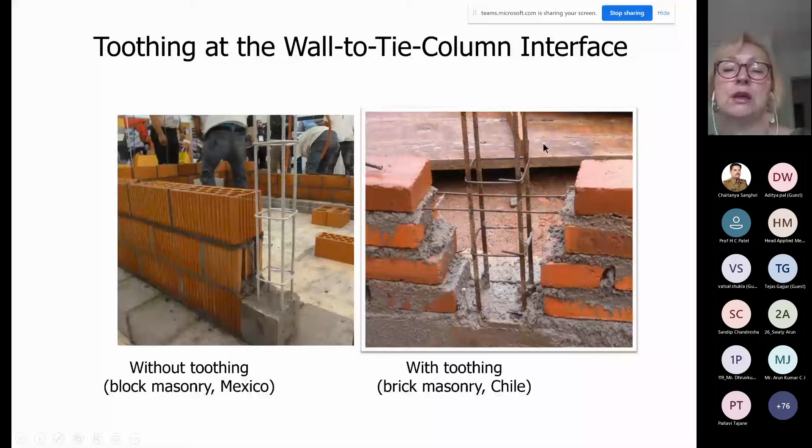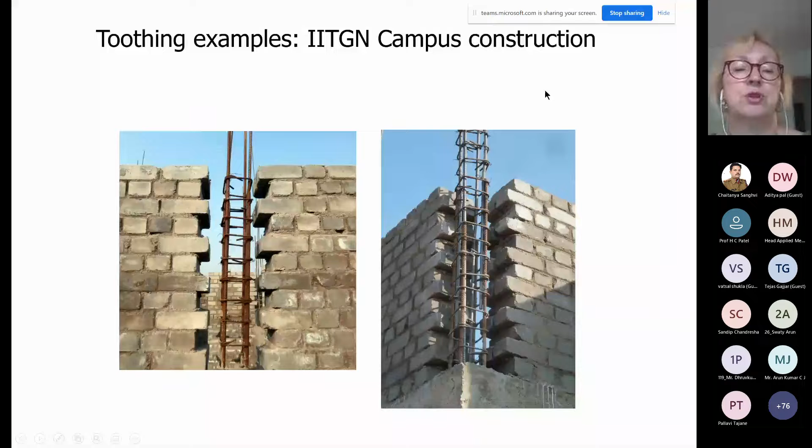These are examples from India. We will be talking later this week about the first large-scale application of confined masonry in India at IIT Gandhinagar campus. I believe many of you are from Gujarat and can visit the campus. Unfortunately, construction is over, so these are photographs taken during construction, from 2013 to a few years ago. There was construction of confined masonry buildings on the campus using fly ash bricks, and you can see the toothing that was achieved in confined masonry walls across the entire campus.

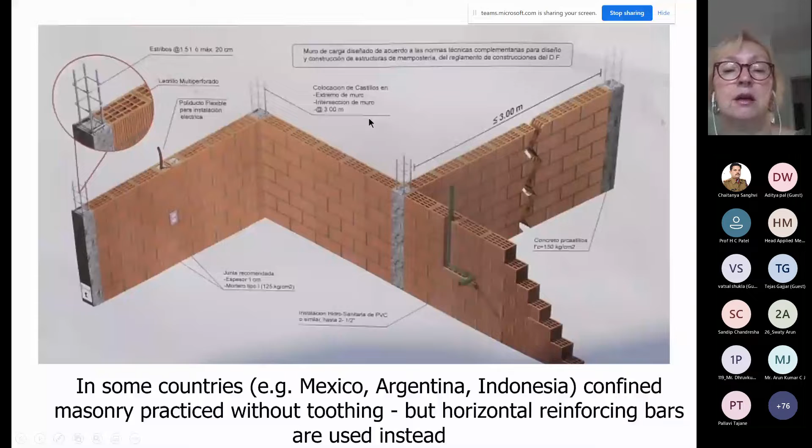These are diagrammatic, very nice schematic diagrams of confined masonry walls in Mexico, showing where confined masonry elements are used. This is from one of the manufacturers of blocks. They use hollow clay blocks, which have no ability for reinforcement, so therefore reinforcement is placed as confined masonry. That practice of confined masonry is very well known in Mexico. You can see here again an example of the wall. In Mexico, for example, they have special elements used as confining elements where they can place reinforcement, and this reinforcement cage is prefabricated and can be delivered, ordered.

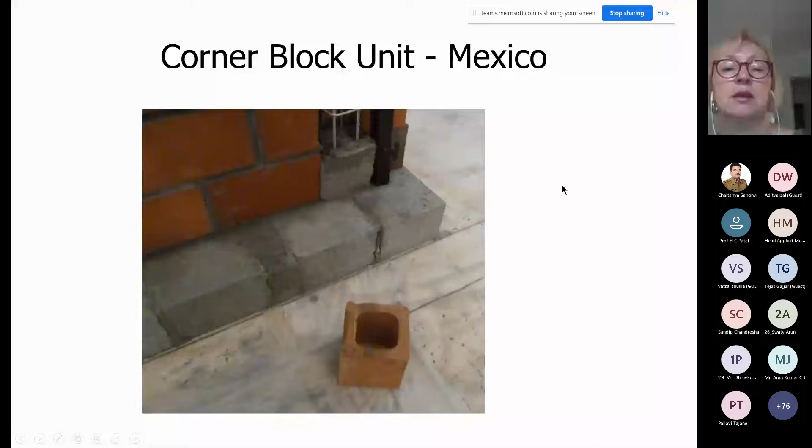You don't have to be done at the site. This is an example of how they would provide reinforcing, and this is an example of reinforced masonry, but it's also an example of how they would provide horizontal reinforcement in confined masonry in situations where there are blocks. This situation is currently not there in India, but in future it may happen that this type of blocks are manufactured, and in that case the reinforcement may need to be achieved through horizontal reinforcement. You can see here this cage, it's prefabricated and cut to size, one story high, and it can be delivered. These bars have been welded at the plant, and they don't have to be manufactured at the site, which is good.

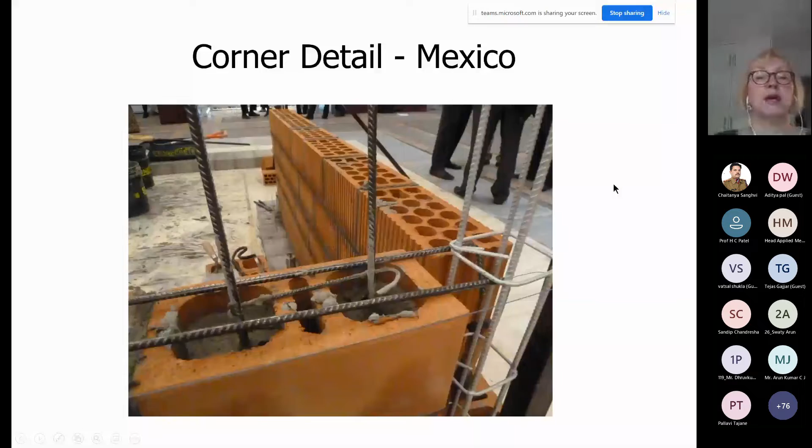So that is all about confined masonry. As I said, there's no need to discuss it more because we will be talking about it anyways throughout the course. The whole course is about confined masonry.

At this point, I would just like to mention what is the difference between reinforced concrete frames and confined masonry. On the left-hand side, the red colored diagrams are related to concrete frames with masonry infills. On the right-hand side, there are diagrams related to confined masonry walls.

On the top diagram, you can see the first thing is what we discussed, construction sequence. In reinforced concrete frames, the frame is constructed first and the wall is constructed later. In confined masonry, we have joint simultaneous construction of walls and concrete elements. First the wall is constructed and then confining elements, but they are kind of constructed together, floor to floor level, whereas in a concrete frame, we have the whole multi-story structure constructed out of concrete, and then walls are constructed.

As a result of this difference in structural system, because in reinforced concrete frame the frame is the main system that carries both gravity and lateral loading, the column and beam elements are larger because they have a main role in the system, whereas infill walls, unfortunately, are often not even considered in the design or in the numerical models used for simulating or analyzing behavior of reinforced concrete frames. So these are robust sizes of column and beam elements in multi-story buildings.

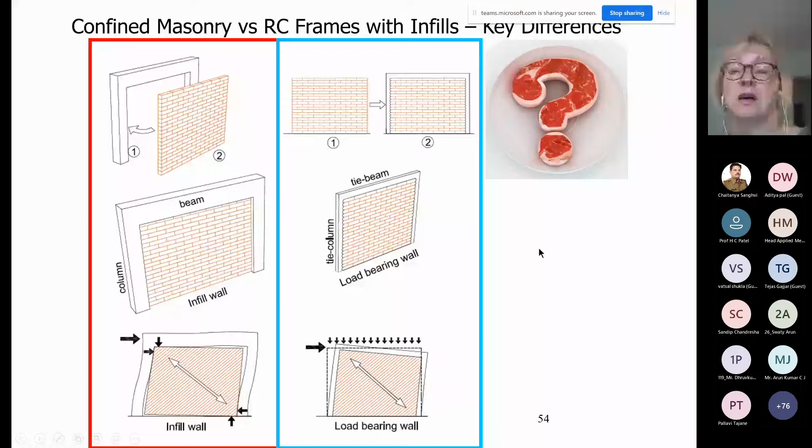That's why education is the key, and that's why you are present on this course remotely, and hopefully you will spread the word about this. So this is from the EERI Confined Masonry Guide, and here I am listing main resources for this course.

The main technical resource is Earthquake-Resistant Confined Masonry Construction, 3rd edition. I believe you have access to this publication electronically. It is also available for order, if you want a printed copy, through NICEE, and it is a very nicely colored publication. I encourage you to order it, but for the purpose of this course, you can use the electronic copy.

You are assigned reading based on this lecture. These are introductory lectures, so chapters 1, 2, and 3. The book has 8 substantial chapters. It is light reading, not complicated, and doesn't have too many equations. Certainly chapters 1, 2, and 3 have no equations. It is just an introduction into confined masonry.

So this is the assigned reading for tomorrow from this book, and at the end you will have a quiz, which will also include questions from the book. That quiz will be on Friday, so you need to make sure to read the book and be familiar with its content.

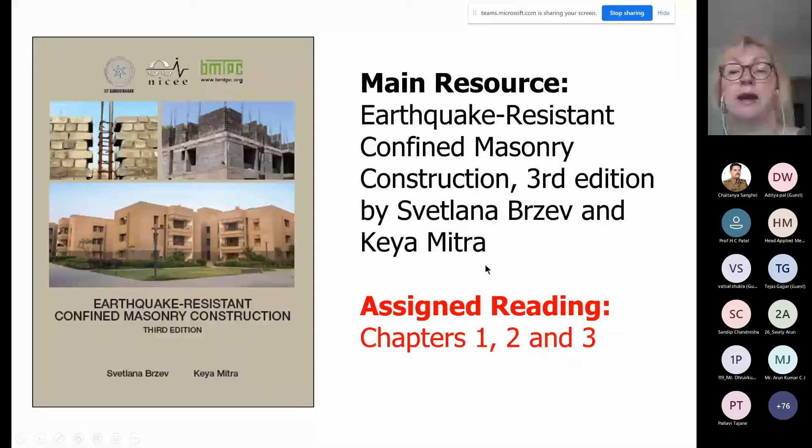An additional resource, which I believe is an international resource, is the EERI Guide, Seismic Design Guide for Low-Rise Confined Masonry Buildings, which was significantly used at the time of development of the code, and many recommendations from the guide are a part of the Indian code. So it is useful to have access to the guide.

It is available free of charge. We can also share it through this course, but you can download it at confinedmasonry.org, which is the website of the Confined Masonry Network, and contains other very useful resources. I am the chair of the Confined Masonry Network, which is an initiative by the Earthquake Engineering Research Institute, EERI, and has lots of useful resources.

So I would encourage you to also visit this site. If you have problem accessing this publication, it is under publications or downloads, and that is one of the publications you can download. So these are all the materials for this lecture. As I mentioned, thank you.